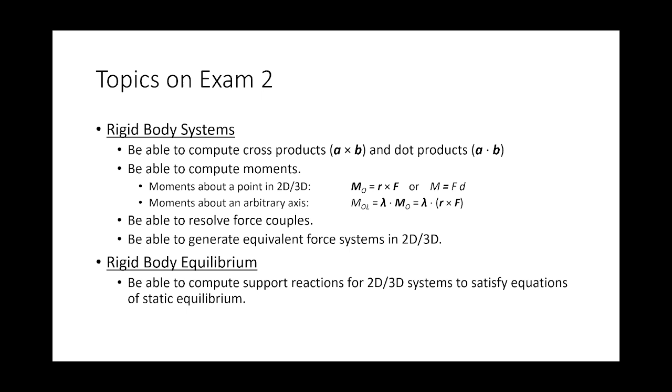Finally, rigid body equilibrium: be able to compute support reactions in 2D and 3D to satisfy equations of static equilibrium.

The rest of this slideshow is just the greatest hits of formulas we've utilized over the past few lectures since exam 1. First, the cross product of 2 vectors. There are 2 ways of doing it. For the most part in class I've focused on cofactor expansion, but if you think the column method is easier, some of you may have used it in previous math courses—take the 2 columns and multiply all the products this way minus all the products that way. If that's how you want to do it, that's fine with me. I'm not a micromanager, I just want the answer to be right. Cofactor expansion is what I use because I think it groups the I, J, and K terms a little better, but that's just me.

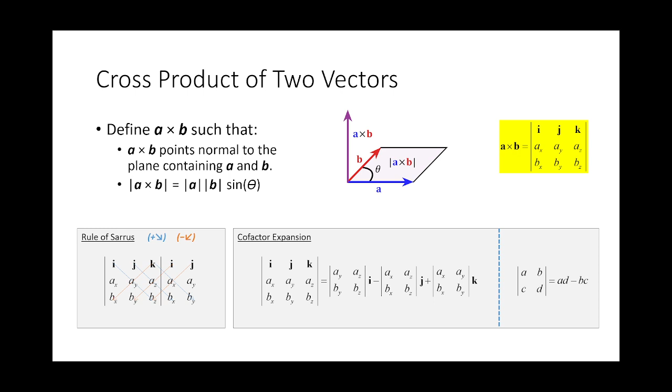Dot product of 2 vectors: if you've got vector P and vector Q, the dot product is a scalar. You take the X coefficients, the Y coefficients, the Z coefficients, multiply the pairs, and add the results. That's all the dot product is—super simple. Also recognize that the cross product and the dot product will yield the angle between 2 vectors. Probably the dot product is a little easier because it's less computationally demanding—you're dealing with cosines instead of sines—so that's not a big deal either.

The formal definition of a moment generated by a force: the moment about a point generated by some force is computed by the cross product r cross f, r being the position vector that starts at the point about which moments are taken and ends at any point along the line of action of f, and f is the force vector. The magnitude of the moment is the force times the moment arm. Hopefully that's old hat by this point.

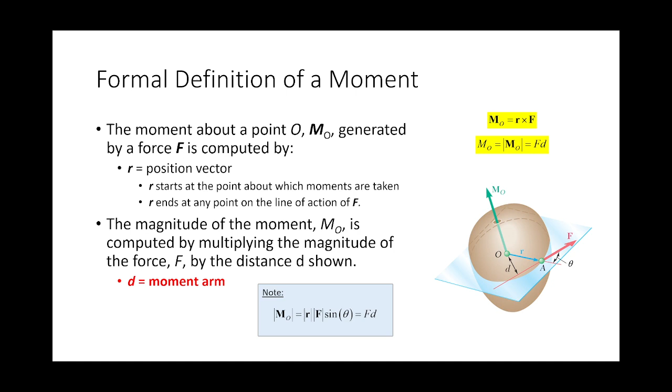If you're doing moments in 2 dimensions, you're doing the cross product of r cross f, but when you resolve this in the xy coordinate system, it only generates a vector along the z-axis. It follows the right-hand rule, and the result is just rx*fy minus ry*fx—basically just one of the terms. So when dealing with moments in 2 dimensions, we tend to only deal with the magnitude because we know the axis about which the moment acts is the third axis—if it's the xy plane, the moment acts around the z-axis.

For moments about an arbitrary axis, we just dot the cross product with the unit vector along the axis in question. And if you want, you could do a determinant and do it all at once. That's fine too.

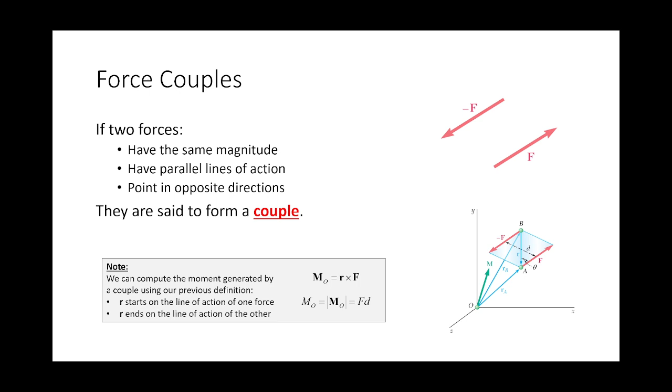Force couples: if 2 forces have the same magnitude, parallel lines of action, point in opposite directions, and are separated by a moment arm, that's a couple. The moment generated by the couple is r cross f, where you take your pick as to which one is f—if this is f, then r is a vector defined from this force to that one. So you're always picking a vector and summing moments from that to the other one.

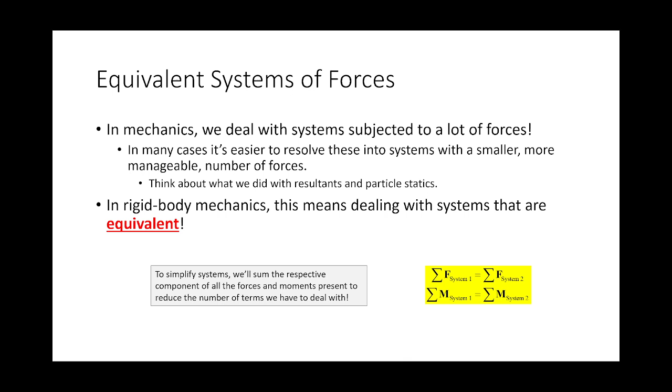Equivalent systems of forces: that's when the sum of forces in system 1 equals the sum of forces in system 2, and the sum of moments in system 1 equals the sum of moments in system 2.

Finally, static equilibrium. These are the support conditions we deal with in 2 dimensions, and some support conditions in 3 dimensions. I'll tell you right off the bat, I'm not going to get hyper inventive with the support conditions I present, because I don't think that adds any complexity to a statics problem—it's still just sum of forces and sum of moments. You won't see any boundary conditions beyond what we've already seen: pin conditions, roller conditions, fixed supports, and problems like determine the force in the cable. That will possibly be there as well.

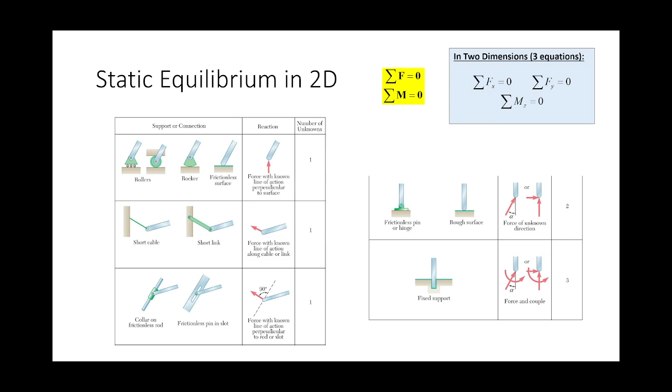Will there be a 3D equilibrium problem with support conditions? Let me answer it this way: if there is, it will probably be hyper simplistic such that the math is fast.

Let me stop right here. I'm not going to give you one of these super long 3D problems like you had on homework 4.3 that probably took you hours to do and say, 15 minutes, good luck. I'm not going to do that to you. That doesn't mean you might not have a 3D problem on the exam, but if you do, it's going to be structured so it's as straightforward as possible. Does that answer your question?

It's possible that we have 3D on the exam. I'm not going to say yes or no, but I'm not trying to make this exam a time crunch. I'm really not. So we might have 3D, but there aren't as many forces to deal with, or all the vectors are easy to write, or I might give you some of the vectors. Because I'm not trying to make this a time crunch exam. I'm really not.

Again, like I said, I was able to do this in 15 minutes. And that wasn't rushing, that wasn't using Excel. I was sitting there with a pencil and paper and a TI-36X. I wasn't using a Casio. Can you believe that? So you picked a good company.

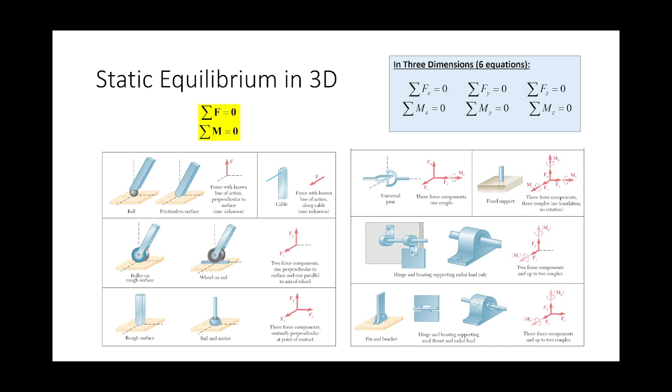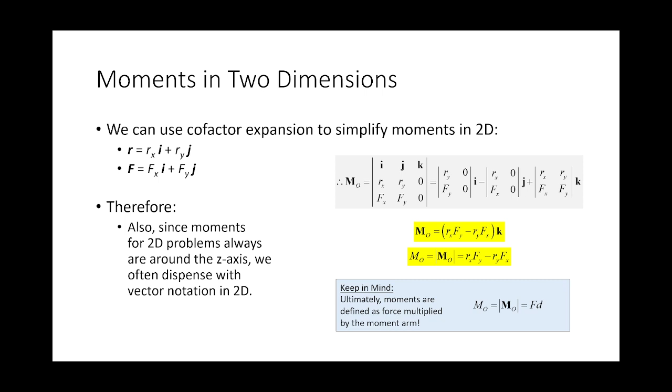What we're doing here is a little more specialized. Instead of dealing with moments about a point, we're talking about moments about a line, or moments about a cable, or moments about a shaft. Let's say, oh, I need some props. Let's say this right here - this is my axis, and we've got some force being applied out in space. Here's the axis and here's the force. That force is going to want to twist that cable a little bit.

So the best way of thinking of it: R cross F is how much moment you get out of that force. The idea is, let's say you got this much moment out of that force - what percentage of that moment is just about the axis? That's kind of what a moment about an axis is. So if I have some force out in space and I'm looking at the moment about this point, it's twisting that point, but what percentage of that is going along this line?

So it's sort of like figuring out how much twisting is going about that line. There are some very significant examples of that in all branches of engineering. If we have an element that's being twisted, it responds differently than if it's being bent. So it's just isolating the amount of twisting about that axis in question. Does that conceptually kind of answer it?

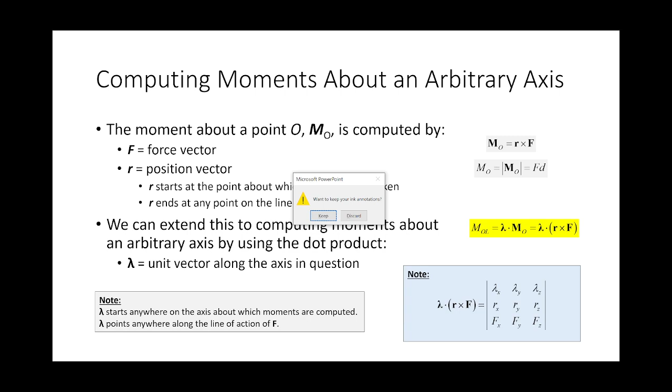3.78. Which homework was that? 3.5. All right, let me go through that, and then let's see. Tell you what— oh, discard. Let me do this. I'm going to pull up the solution, and then if there's any one piece where it's like, okay, I don't get that, we'll go through that, okay?

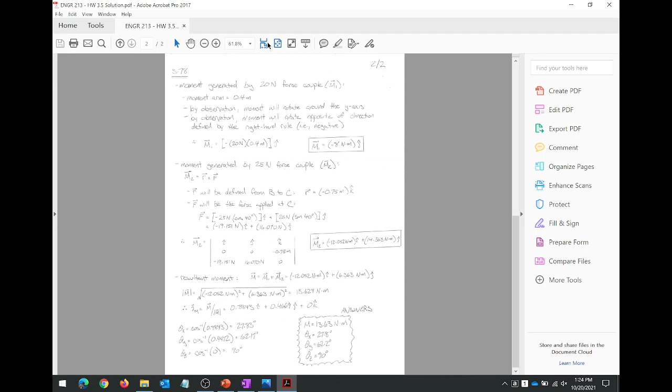Okay, so this one right here. Okay, so let me zoom into this a little bit.

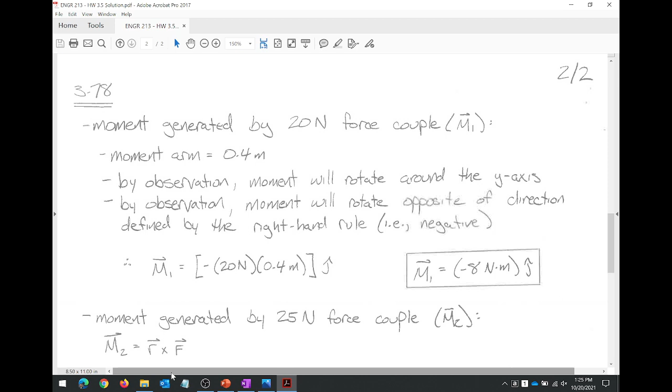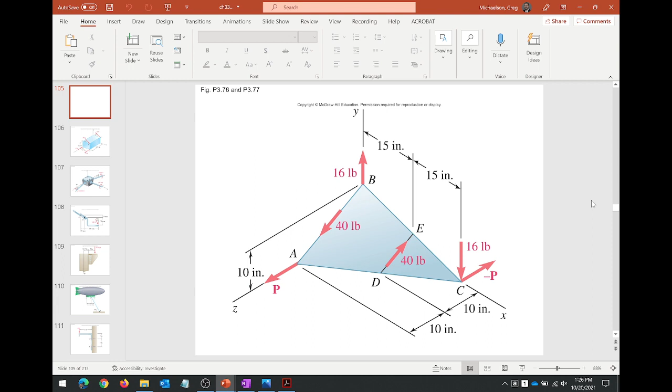Hold on, technology, I know. So this is me pulling up the image PowerPoint so we can actually take a look at the problem. Okay.

So this is the problem, right? Okay, all right. The first thing I want to make sure everybody understands is that conceptually, the sum of forces is 0. And that is always the case with systems that only have couples. The sum of forces, not the sum of moments, the sum of forces, okay?

But because they're not both going through the same point, because they are both separated by a moment arm, the sum of forces is 0, but the sum of moments is not. So what we've got to do is see if we can resolve this by just looking at the moments. That's the nice thing about force couple systems—when you look at it from an equivalent systems problem, remember how we had a body with a bunch of stuff on it, and we say let's resolve that into a single force and a single moment. When you're dealing with a system that only has force couples, you can resolve it into a single moment because the sum of forces is 0. Does that concept make sense?

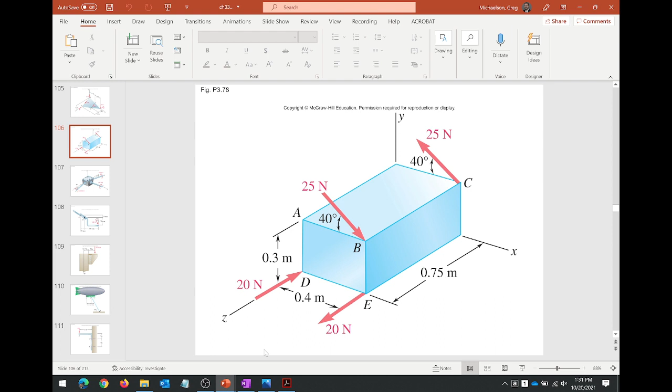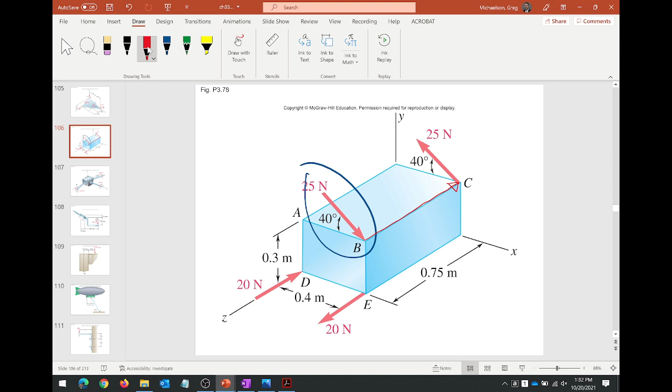So whenever we're letting the math work itself out, what we need to do is pick one point that we're going to sum moments about. There is no right one, I just flipped the coin. So what I did is I said, okay, I'm going to sum moments about this point right here. I might have done it opposite in the problem, it doesn't really matter. Let's just say this is the one I summed moments about. So in this case, R is this shaded thing. R is going to be this vector. This is R, and this is F. Does that make sense? Because I'm summing moments about point B, this one does not generate any moment. The only one that generates moment is this one, separated by this moment arm. So all you need to do is write a definition for R and F and just do R cross F.

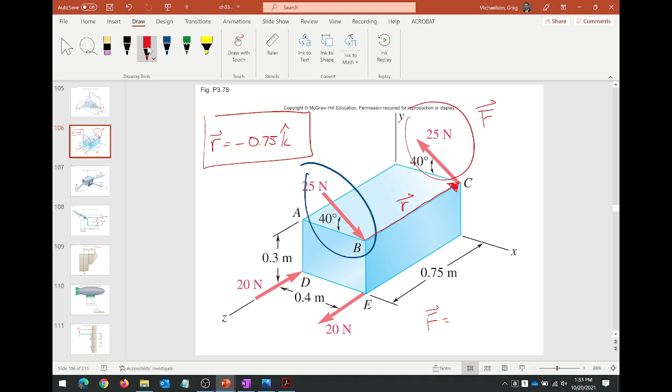So R in this case is what? If I start at B and I go to C, I think I go negative 0.75K, is that right? Nothing else, right? So there's R, and F - now here's what's going on with F. So if I look at these two forces, they're both along the XY plane. There's no dimension defining them in and out of, along the Z-axis. So it's going to be some component times I plus some component times J.

Now, we do know the magnitude of the force. It's 25 newtons. So all we need to have is 25 times a trig function here and 25 times a trig function here. The only thing we got to get right is the signs, the positives or negatives.

So if I look at this force up here, it is pointing left along the x-axis. So I'm going to say that this is negative along the x, and positive along the y because it's pointing upwards. So all you have to say is 25 cosine 40, because the angle is measured with respect to the horizontal, and 25 sine 40.

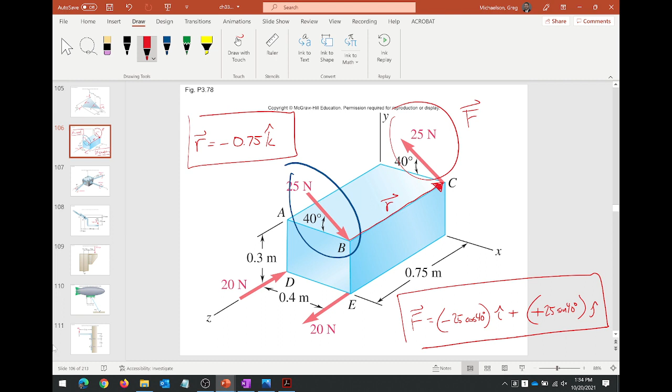So here's F, here's R. If I have R and I have F, I do R cross F, and that'll give me the second moment vector. So if you go back to the solution, here's moment 1, here's moment 2.

Just add the two vectors together, and then you can do magnitude and direction. So when I add the two vectors up, I get a resultant times i, a resultant times j.

The magnitude of the moment is just Pythagorean theorem, because at this point it's just a vector like any other. So if I give you a vector with i, j, and k components, how do you determine magnitude and direction? Well, magnitude, you just use Pythagorean theorem.

And in order to determine direction, all you got to do is take the vector, divide it by its own magnitude to get a unit vector, and then take the inverse cosine of each of these components, and boom, I've got the direction. That's all there is to it.

So I guess the follow-up question, and this isn't just to you but to everybody in the class, is: if I give you a vector, can you determine the magnitude and direction of that vector? Just period. If you can do that, then it's just writing moment vectors, summing them, and doing that. So did that answer your question? Is there any specific part I didn't cover, or anybody else?

That's a great question, though. Thank you.

Any other questions?

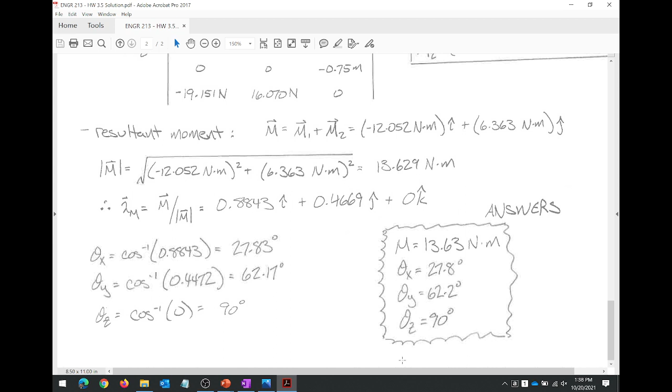I got in here at 101. Okay, hold on for one second.